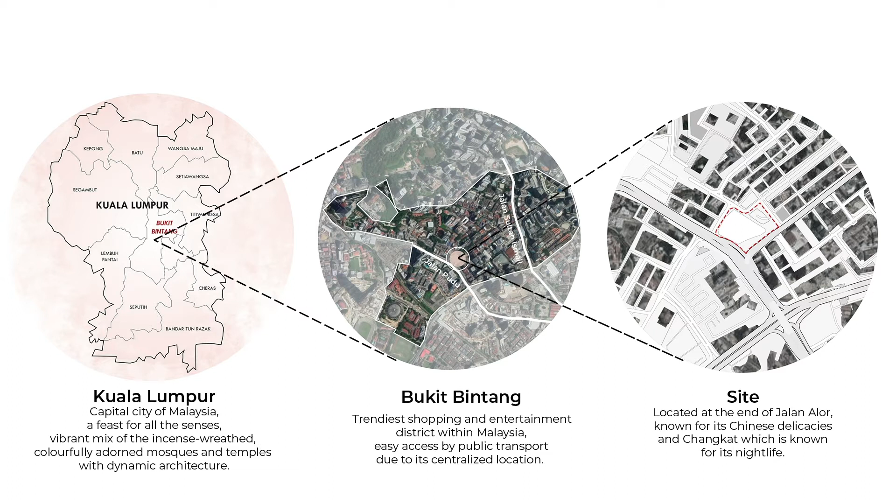Bukit Bintang itself is an enclave of Kuala Lumpur, harbours many beautiful layers of life and forms within a developing urban setting. A city of movement, the life in Bukit Bintang never ceases to stop beating, even until dusk, where the street lights and another new side of life start beating again until late night. However, in current pandemic times, it has also cast a large shadow while the public remains unaware of the many hidden perils of the site.

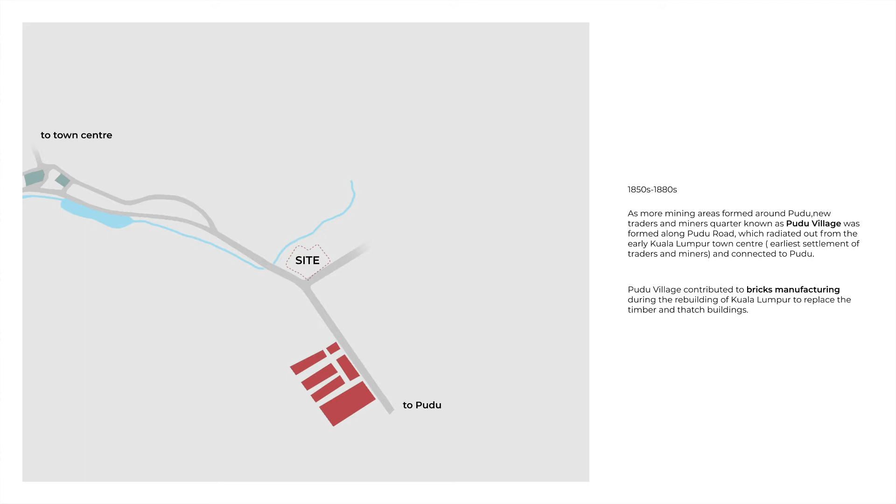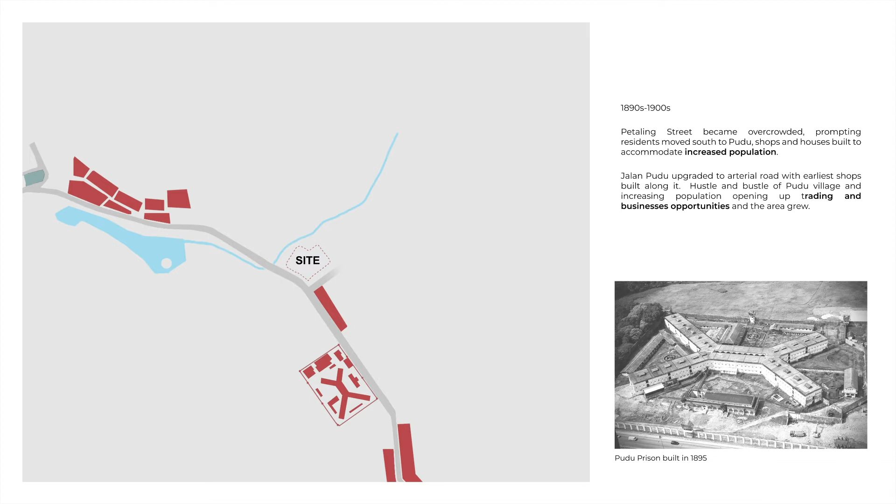In the 1850s to 1880s, as more mining areas formed around Pudu, new traders' and miners' quarters known as Pudu Village were formed along Pudu Road, which radiated out from the early Kuala Lumpur town centre and connected to Pudu. However, in the 1890s, Petaling Street became overcrowded, prompting residents to move south to Pudu. Shops and houses were built to accommodate the increased population.

Increased population at the Pudu settlement opened up trading and business opportunities, and the town grew. In the 1950s, after World War II, forest and agricultural land were cleared for commercial development; more Chinese residents and traders moved in, and low-rises, shophouses and housing were built for increased needs. Over time, the enclave became economically self-sustaining. In the 1980s to 2000s, commercialization and gentrification took place.

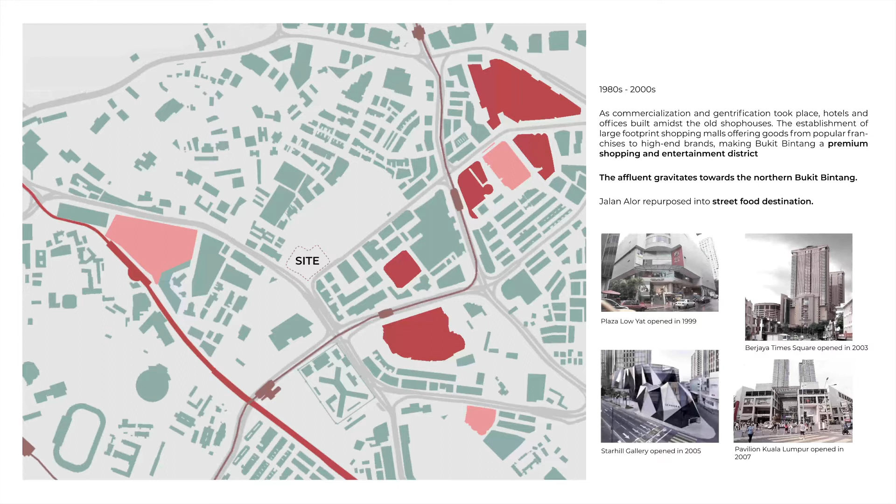Hotels, offices and malls were built amidst the old shophouses, making Bukit Bintang a premium shopping and entertainment district. The affluent gravitate towards northern Bukit Bintang. Jalan Alor was repurposed into a street food destination. From 2010 to 2020, Greater KL became one of the national key economic areas. Urban connectivity of the Southern Golden Triangle was enhanced further. The Bukit Bintang MRT station was built to strengthen business activity. The migrant worker population grows in parallel with increased job opportunities, making it a city of migrant workers and locals.

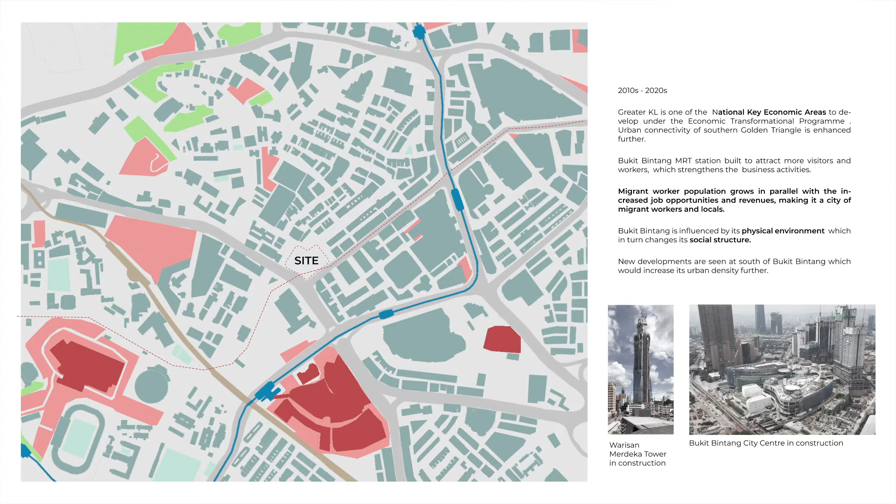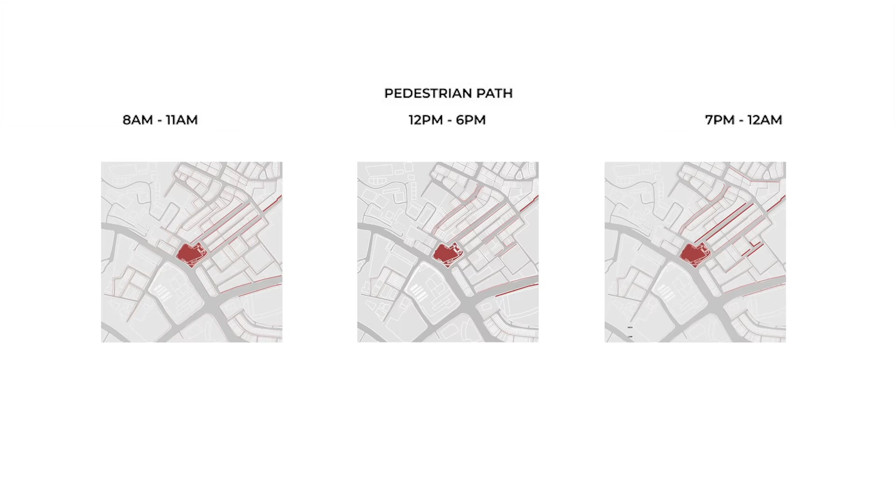The LRT and monorail have been a major convenience to the area as they were built in proximity to the site. While most locals drive to the area by private transportation, there is a bus stop situated next to the site, just in front of the shop lots along Jalan Pudu.

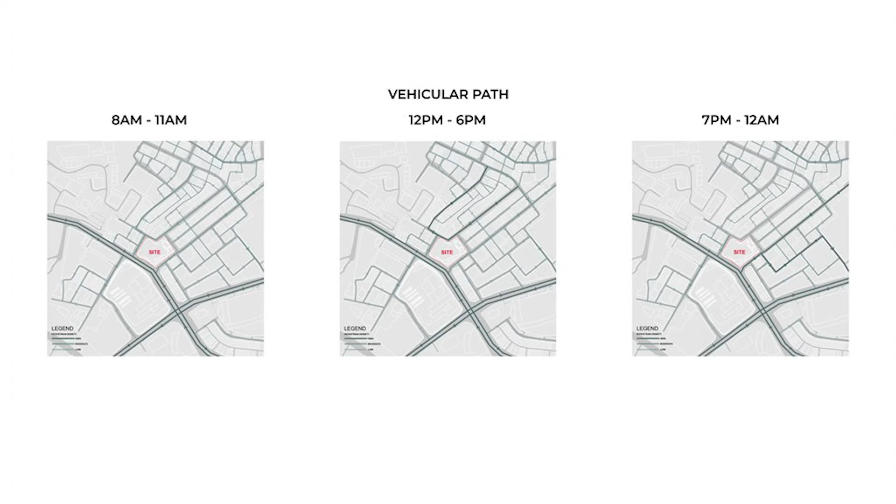The vehicular path can be seen at its peak densities in the afternoon during lunch hour and before the night market starts along Jalan Alor. Jalan Sultan Ismail and Jalan Bukit Bintang can be seen with high vehicular densities from the morning, as people head off to work, until late night, as people go shopping and have dinner.

The pedestrian density of Bukit Bintang consists of a huge contrast between daytime and nighttime. Social gatherings are observed more during nighttime, especially in Changkat Bukit Bintang and corners of Jalan Bukit Bintang. Meanwhile, Jalan Alor acts as a hotspot for locals coming to experience the food at night. The streets also indicate more migrant pedestrian density during noon, in preparation for the night activities.

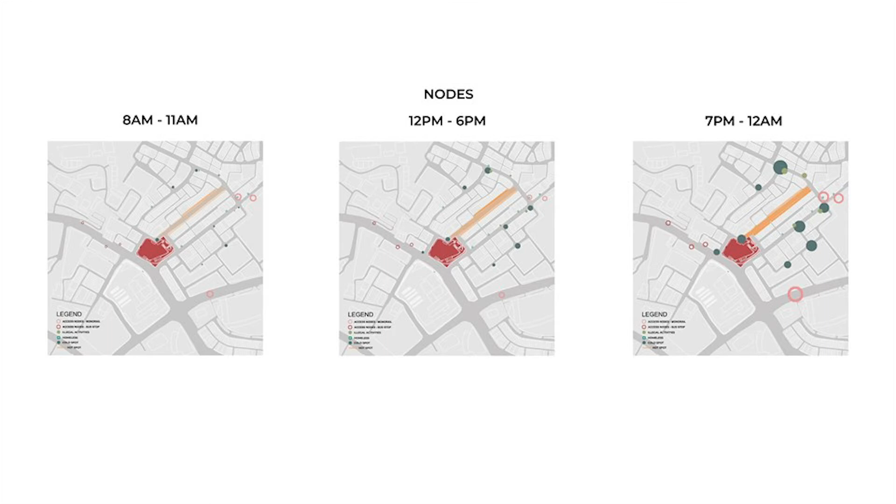Furthermore, homeless beggars are found within Jalan Bukit Bintang and Changkat Bukit Bintang during both day and night, whereas illegal activities increase more during evening and nighttime.

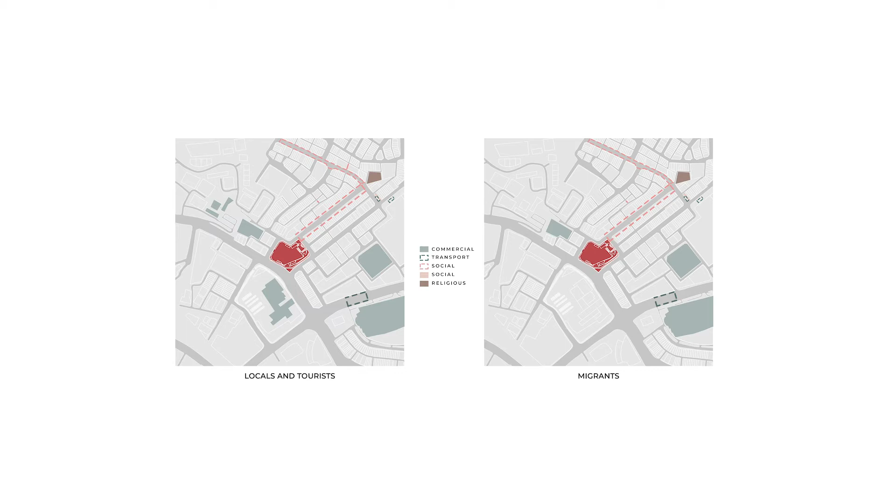As landmarks are objects or features of a town that are easily seen and recognized from a distance, different users tend to have different perspectives on what places they identify as landmarks. For locals and tourists, common landmark identifiers are Lot 10 Plaza, Times Square, and even the Chinese Hill Maternity Hospital and the KL Baptist Church. Let alone for the locals in the area, the Jade Garden apartment is known to be a residential area for some of the locals within the site.

Jalan Alor is also known as one of the main social landmarks for locals, tourists and even migrant workers, as the street functions to serve most of its users, many of whom are migrant workers. In addition, next to Jalan Alor resides the residential area for the majority of the migrant workers.

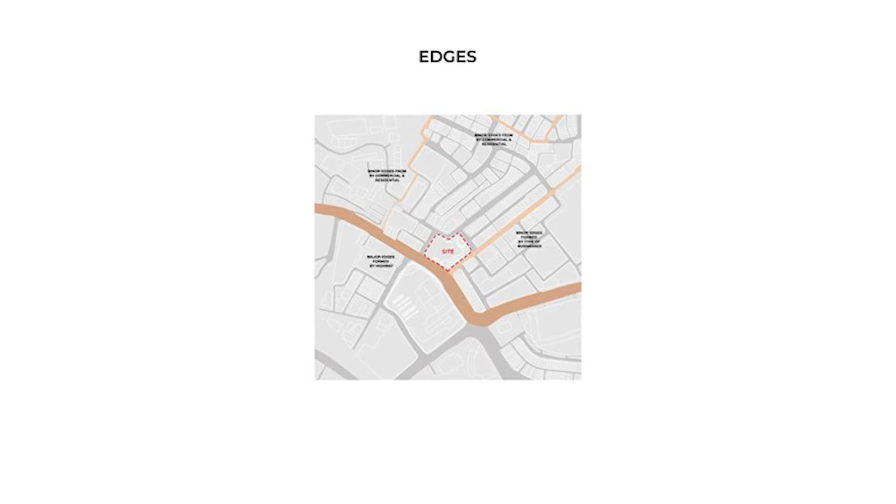The major edges can be seen along Jalan Pudu all the way up to Jalan Imbi, as its edges are formed by the highway. On the other hand, commercial and residential areas also form a minor edge, while different types of activities and business happening in the area also form another minor edge. This clearly shows that major edges come from permanent edges, while minor edges depend on the ongoing activities and business in the area. The user groups around Site B are generally categorized into three categories.

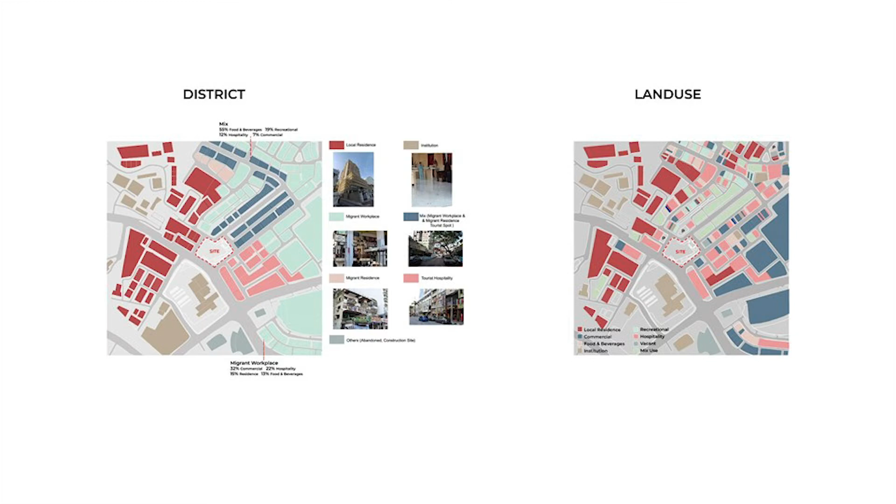These are the local, migrants, and tourists. The district of the local is mainly residential and is surrounded by institutions such as schools and hospitals. Majority of migrant district overlaps with tourist district, as most of the migrant workers work in the commercial sector in tourist districts such as restaurants, massage, and hotels.

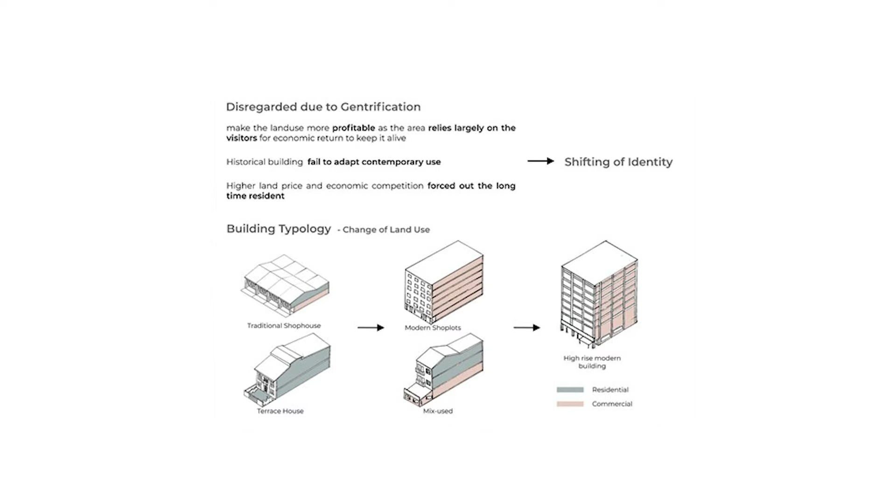The physical design of Bukit Bintang is mainly aimed at creating a high-end shopping precinct for visitors and business operators. Fine-grained shop house and housing typology allows denser urban streets and encourages higher intensity of life between buildings, but it is slowly being replaced by coarse-grained modern buildings with larger footprints.

This transformation is due to gentrification. In order to make the land use more profitable, as the area heavily relies on visitors for economic return, historical buildings failed to adapt into contemporary use, thus becoming less efficient with suboptimal utilization. High land price and economic competition forced out the long-time residents, resulting in a shifting of identity.

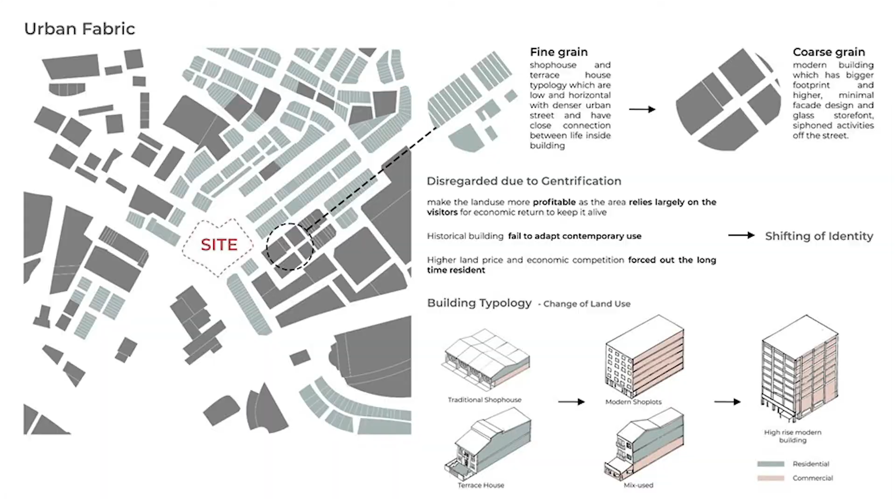Building typology, change of land use. The building typology started with low-rise shop houses and housing built by Chinese residents, then transformed into vertical mixed-use buildings and shop lots with much bigger footprints, with commercial activity at ground floor and upper floors utilized as living space for migrant workers.

Modern high-rise buildings in Bukit Bintang have fewer stores and activities happening at the ground floor compared to surrounding fine grain, traditional buildings. Few traditional shop houses remain around the historical streets of Changkat Tong Shin, Jalan Pudu, and Jalan Sin Chew Kee. Their poorly preserved state results in diminished cultural significance.

Modern. Transformation of Bukit Bintang as the shopping and entertainment district ensued an increase in population and financial profitability. Commercial and mixed development buildings of various scales replaced traditional shop houses, redefining the place's character.

Facade. Building typology at Jalan Bukit Bintang has changed dramatically throughout the century, displaying a varied collection of shop houses and high-rise buildings. The harmonious and continual visual quality along Changkat Tong Shin is broken by modern structures, a sudden change of skyline, distinguishing from the humble traditional shop houses.

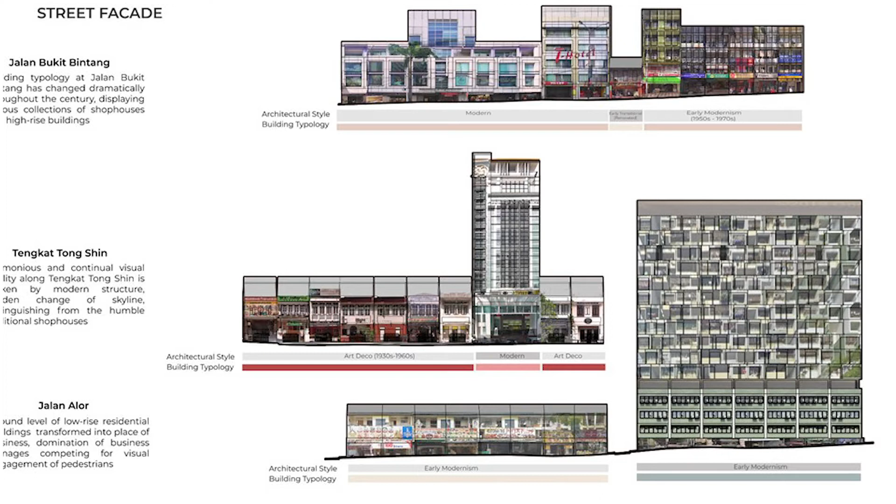The ground level of low-rise residential buildings has transformed into places of business, with the domination of business signs competing for the visual engagement of pedestrians. As Bukit Bintang becomes more compact and denser, social activities are encouraged at the front street. Main streets are vibrant with cultural reference and community identity, and house streets and alleys are being used.

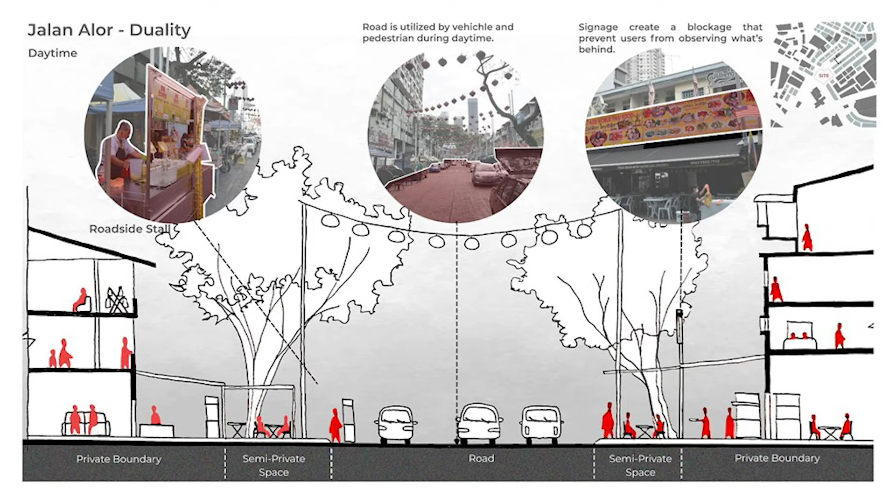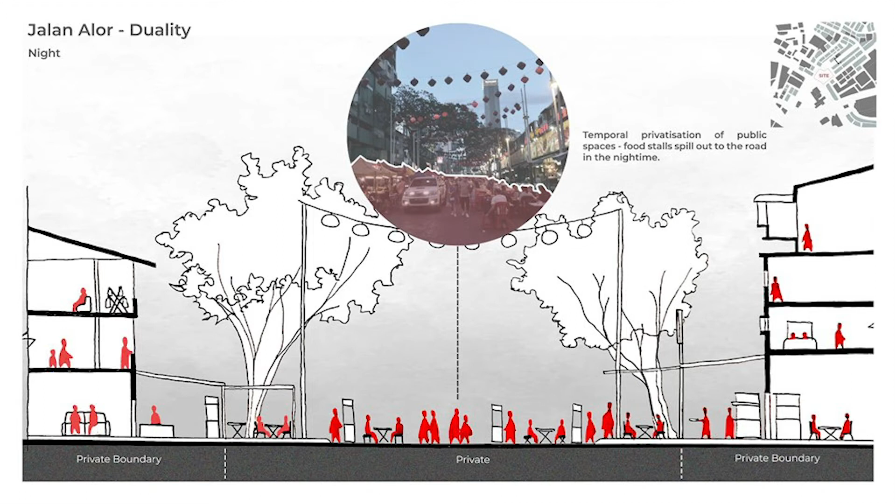Jalan Alor, Duality. Jalan Alor is a famous food street with consistent low-rise buildings, giving a comfortable sense of enclosure. The land use started off as residential and transformed to mixed use with food and beverage businesses at ground floor that extend all the way to the pedestrian path.

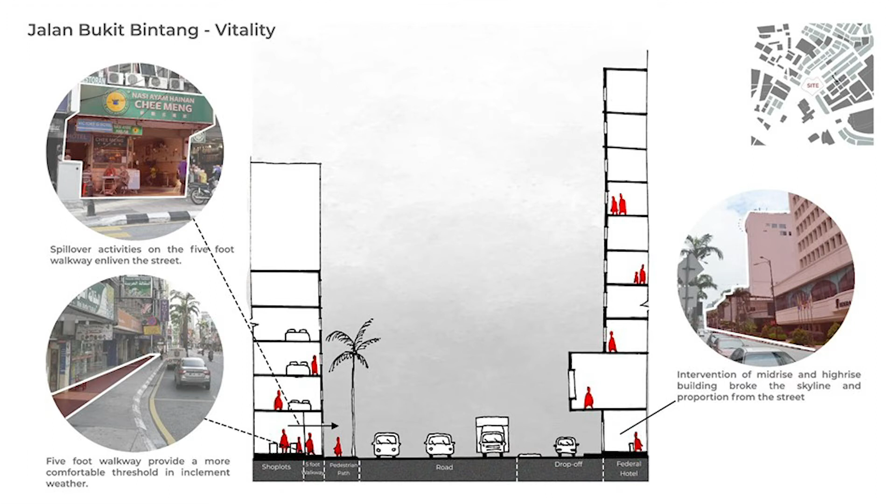Jalan Bukit Bintang, Vitality. Jalan Bukit Bintang is a popular shopping street with high pedestrian and vehicle density. Spillage of business activity onto five-foot walkways enlivens the street. Injection of modern mid-rise and high-rise buildings varies the skyline and proportion from the street.

Jalan Tengkat Tong Shin, Belongingness. With the preservation of traditional terrace houses utilized for food and beverage business at ground floor, it expresses the original characteristic of Bukit Bintang.

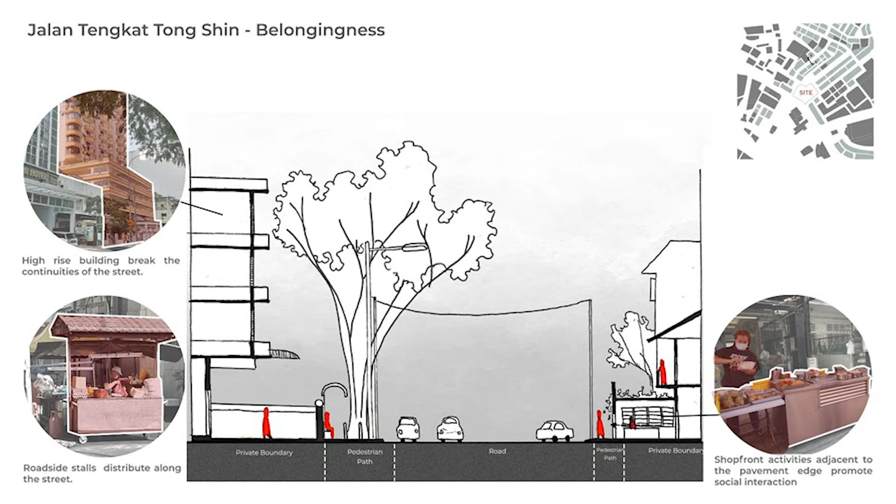Back alley of Jalan Bukit Bintang, Confined. The back alley with a high level of enclosure is a transient space for pedestrians. Jalan Rembia, Vibrancy. Jalan Rembia as a back alley is rejuvenated through activities and purposes. The mural art makes a major contribution to giving the place character and identity, bringing people into and through the place.

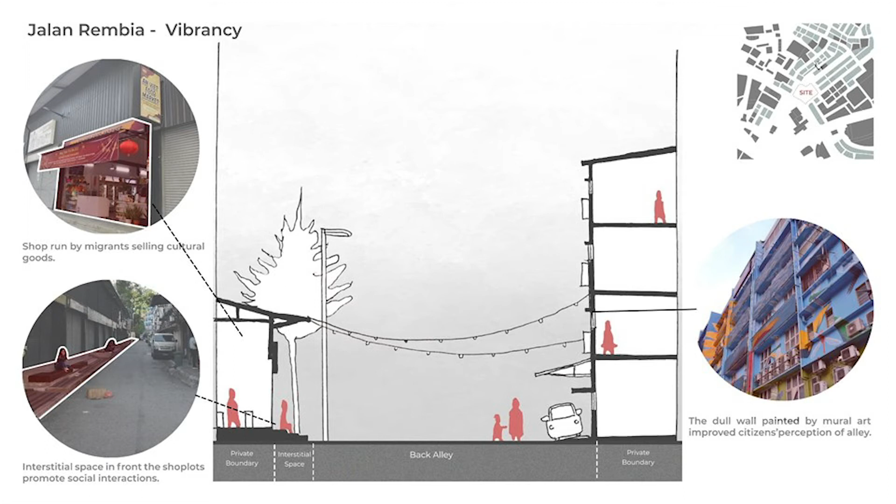For social aspects, it covers the different user group categories, which are the permanent insiders, temporary outsiders, observers, the human interaction, and the movement pattern, as well as issues on site.

Behavior settings. In Bukit Bintang, the existing users are categorized as permanent insiders, temporary outsiders, and observers. Permanent insiders include local residents and local traditional business owners.

The current existing traces and presence of local communities is notably reducing due to the gentrification of economic and modern building developments. Seen from the local perspective, they are slowly losing their sense of belonging to the place, as nowadays the youngsters are moving out from the old streets in Bukit Bintang, and the rapid frequency of building development leads to the fading traces of existing local pride.

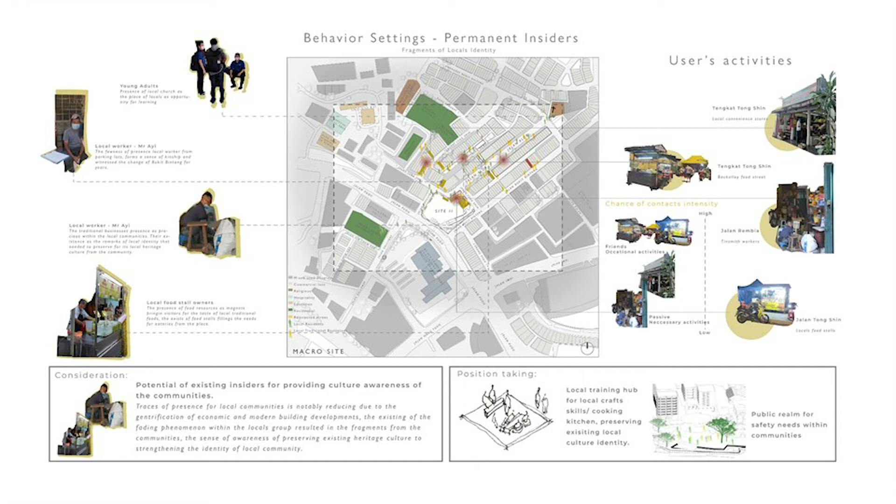Temporary outsiders. The existing communities of temporary outsiders include migrant workers and migrant residents, homeless people, drug addicts, and prostitutes. This user group stays in the old streets of Bukit Bintang for various purposes, with the changes in economic status leading towards the empowerment of economic stresses and social pressure from survival around the site.

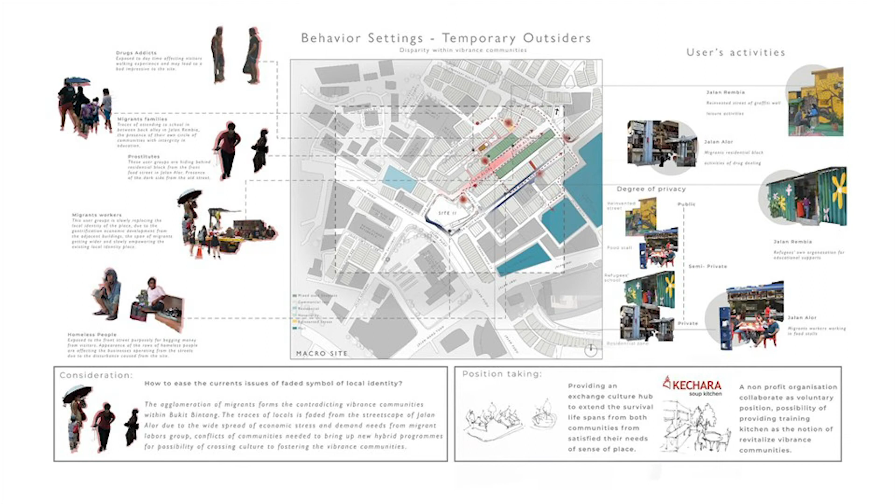With the appearance of vibrant communities comes the presence of a culture barrier, giving a downfall of impression onto the site. The migrant groups are present within the old streets of Jalan Alor. Living in between the conflict of cultural beliefs of local communities inside creates two parallel dimensions of communities lacking the intersection between human cultural interaction.

Observers. The observers include tourists, local visitors, and students. The presence of a young adults user group from local communities and migrant communities forms their own educational institution from their own formalizing way of education.

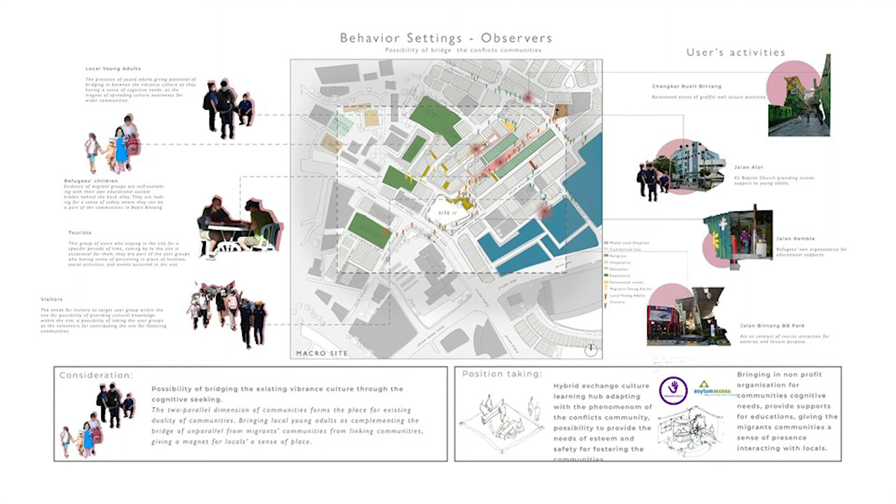The duality of existing communities is needed to provide support for extending their survival span, especially towards the existence of migrant children communities. Living conditions within Jalan Rembia are very poor.

Social issues on site. A bustling street such as Jalan Alor and Jalan Bukit Bintang is known for its progress over the years. However, what most people are not aware of is the conflicting parallel dimensions of different user groups going on at the same time. Homeless people, who are largely comprised of the elderly and the mentally ill, can be seen around the area.

Their presence increases whenever there are visitors on site, as they aim to beg for money. In conclusion, a place with its own characteristic offers its own identity and belonging to the people. As such, the community's needs prove that the contact points of a place enable the intersection between different user groups together, movement pattern and social needs.

For the movement pattern, we analyze the pedestrian movement through tracking the user groups by permanent insider, temporary insider, and observer. During the day, the densest area is Jalan Alor.

Cognitive needs of learning, education, and expressing are shown by the trail of the permanent insider, as they can be seen at schools and banks. Affiliation needs for a sense of belonging to culture are also shown, as the trail leads to local residential, old shops, and religious buildings.

Survival needs of the temporary insider between the community, as a lot of migrant workers are seen walking through the back lane and through shop houses to get to their place of work.

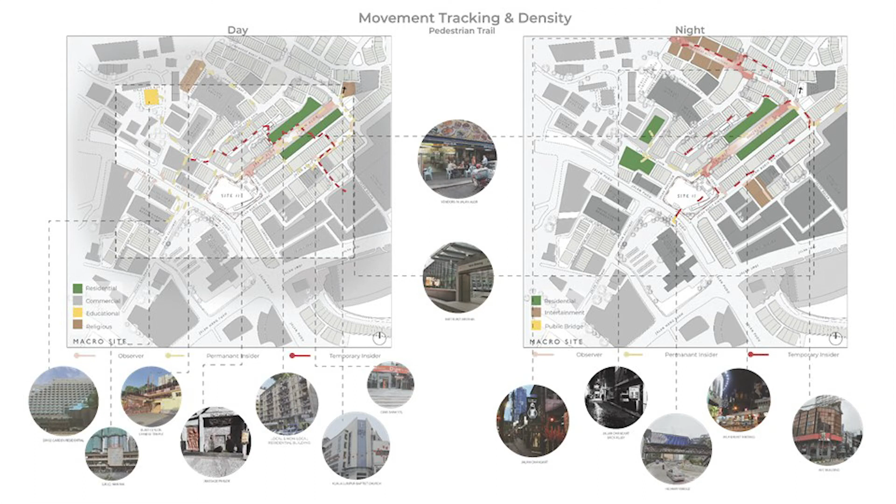Note that during the night, the permanent insider and observer rarely walk through the back alley, while most temporary insiders use the main and back lanes during the night.

In the visual dimension, explaining the social issues within Bukit Bintang could be boiled down into three main categories: the locals' dissatisfaction, the migrants' cry, and in between these issues is the parallel duality that exists within Jalan Alor.

It's been observed that locals in Bukit Bintang show a strong distaste towards the migrants, and some are even calling them cultural bandits, as they are slowly taking over the site's identity in Jalan Alor.

The migrants' cry. Surprisingly, the worries of the migrants and locals differ drastically in the present time. Due to job instability in COVID, migrants are more worried about their livelihood than locals' opinions towards them.

Although most of the migrant workers were documented, they still appeared to be very uncomfortable when they were being approached and often refused to interact.

Due to cultural difference, some migrant workers appear to be ill-mannered in Bukit Bintang, thus making people feel unwelcome.

To further their worries, documented versus undocumented migrants receive pay and benefits differently, and with the pandemic pressure upon them, their future doesn't seem to be bright down the road.

Lastly, to conclude the social issue, we determine that the parallel duality of Jalan Alor embodies the issues of the site: the rift and segregation between the migrants and locals caused by lacking intertwine and interaction.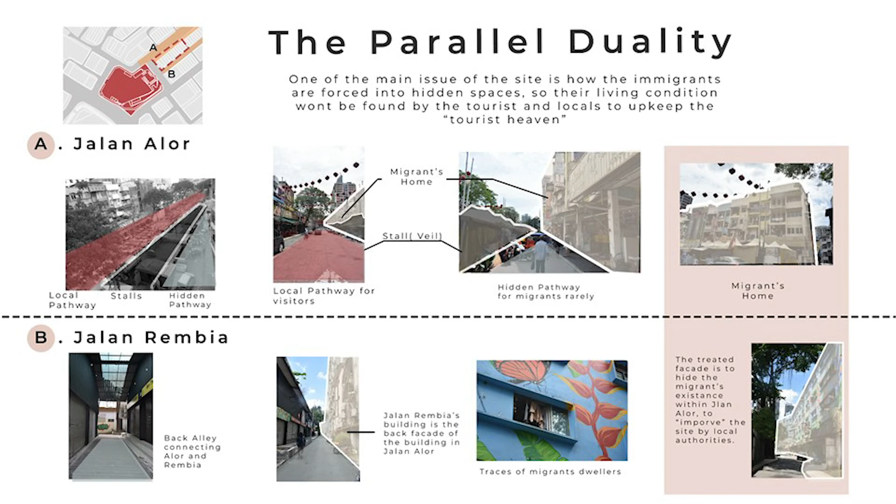This is used to make the real Jalan Alor facade distinguishable from the rear, making visitors unable to find traces of migrants within the building, as if they were a negative influence.

Introduction to microsite. Zooming into the microsite, site section A cuts along Jalan Alor, showing a slight slope in context. Site section B reveals the difference in level of the adjacent roads.

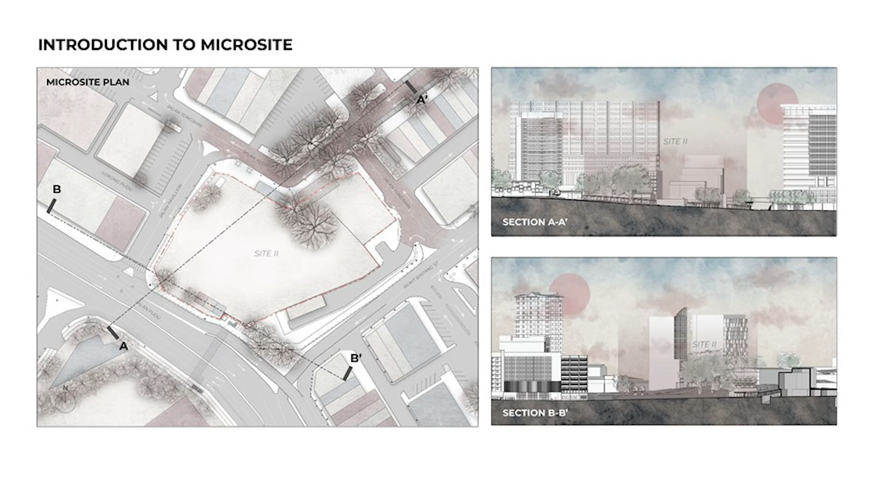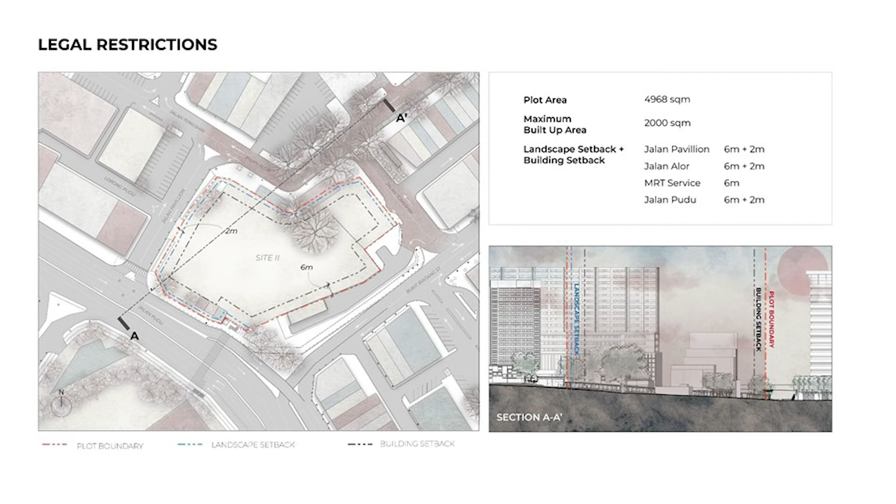Legal restrictions. The plot area is approximately 4,968 square meters with a maximum built-up area of 2,000 square meters. The building setback required is 6 meters, with an additional 2 meters for landscaping.

Softscapes. Softscapes of the site consist mainly of angsana, along with some fiddle fig trees as well as wild cinnamon, while palm trees are located beyond.

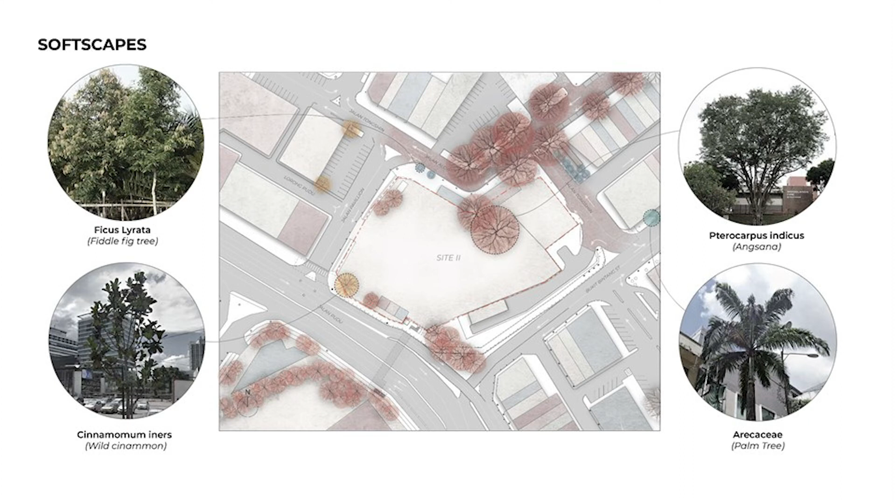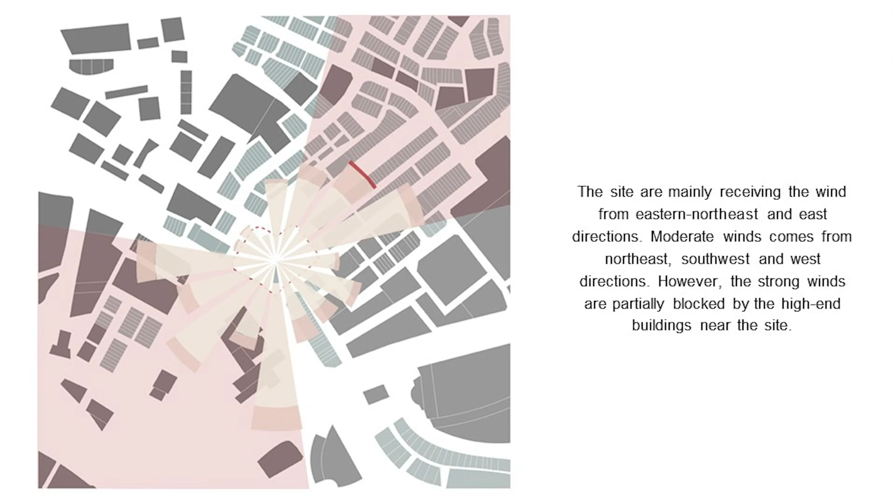Wind pattern. The wind mainly comes from the northeast and east direction of the site, but is partially blocked by the high-end buildings. Shadow pattern: the morning sun creates a west-oriented and longest shadow pattern.

This results in the longest term stays, highly activated area, and highly shaded vegetation area. The early noon sun creates a south-oriented and shorter shadow pattern, which results in the shortest term stay, low activated area, and low shaded vegetation area.

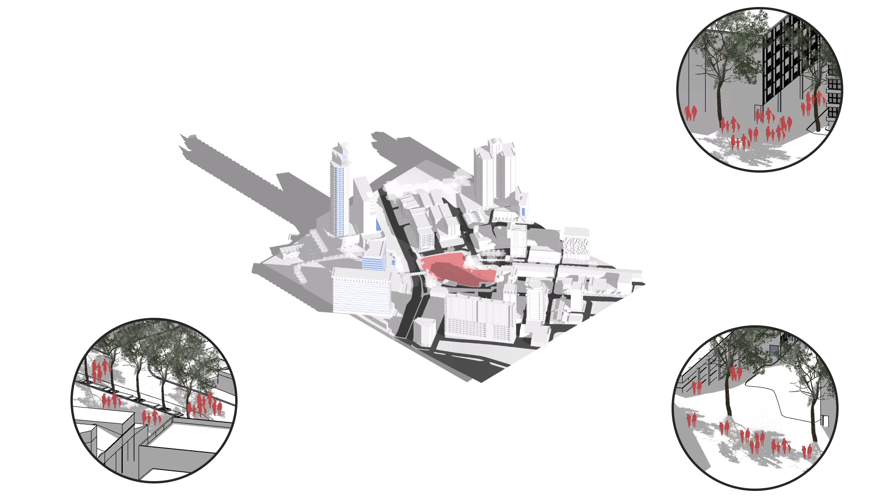The late noon sun creates east orientation and short shadow pattern, which results in short term stay, partially activated area, and moderately shaded vegetation area.

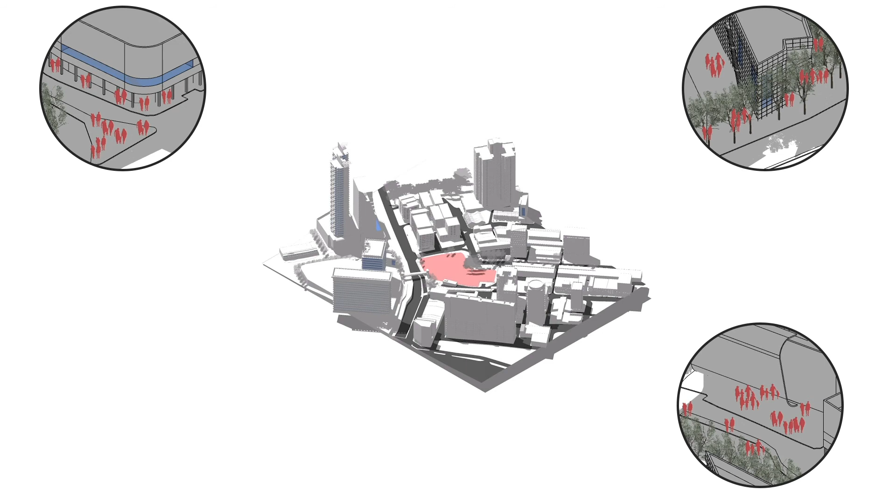The evening sun creates an east-oriented and long shadow pattern, which results in long-term stay, highly activated area, and efficiently shaded vegetation area. Excessive shading is provided at the corner of the site in the morning, and the highly shaded area is at the west area of the site in the evening.

The flow of pedestrians is very low in the solar radiated site during noon. Excessive shading is provided at the site corner in the morning, but the highly shaded area is at the west area of the site in the evening. The flow of pedestrians is very low in the solar radiated site during noon.

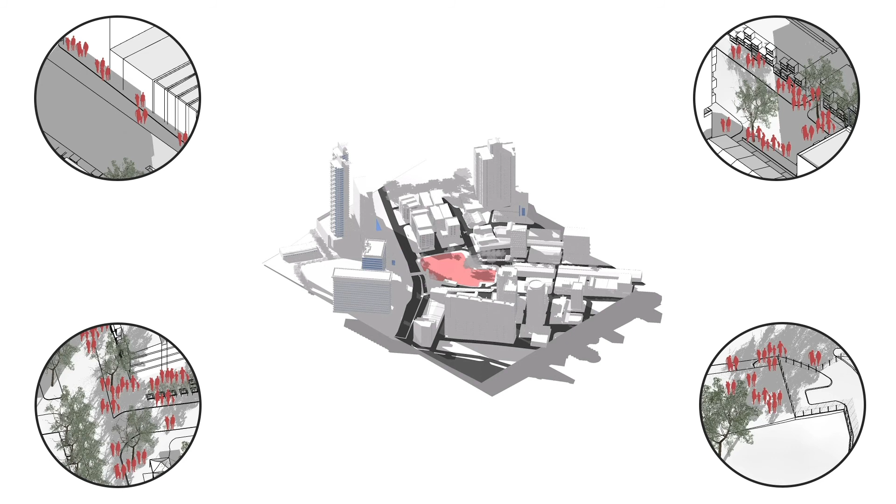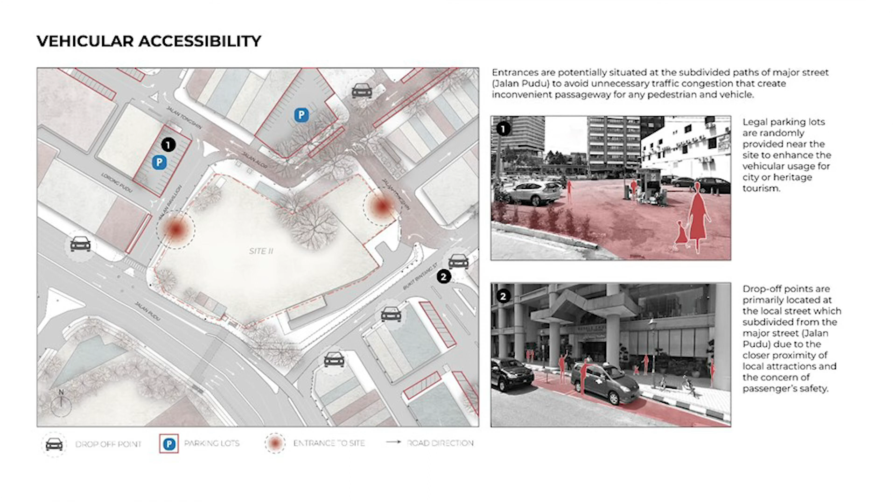Vehicular accessibility. The site consists of an entrance that creates convenient passageway surrounded with parking opportunities and drop-off points that enhance local tourism. Walkability and existing structures.

Walkability of the site is enhanced by street vendors, shaded pedestrian walkway, pedestrian bridge, and site canopies. However, it is declining due to inconvenience brought by the MRT service.

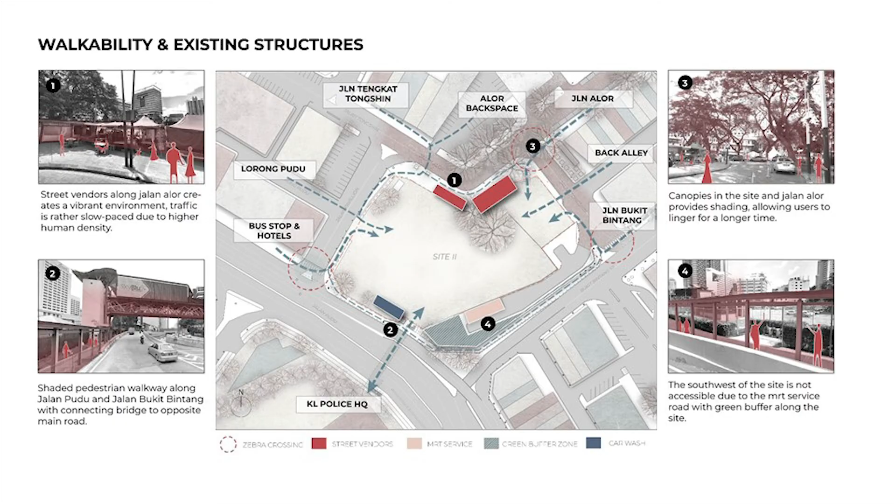Views from site. The site was surrounded with different urban layers such as greeneries, bold buildings, and shaded pedestrian walkway at the north, while heritage core areas services and urbanized street at the south.

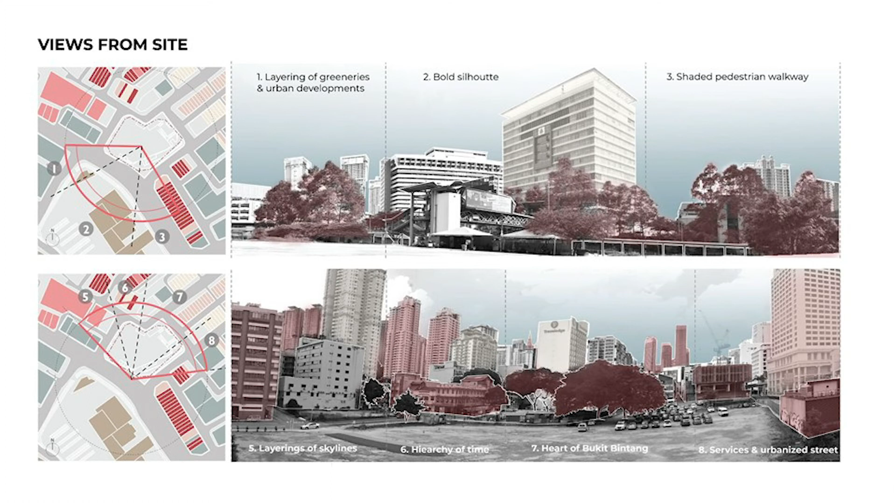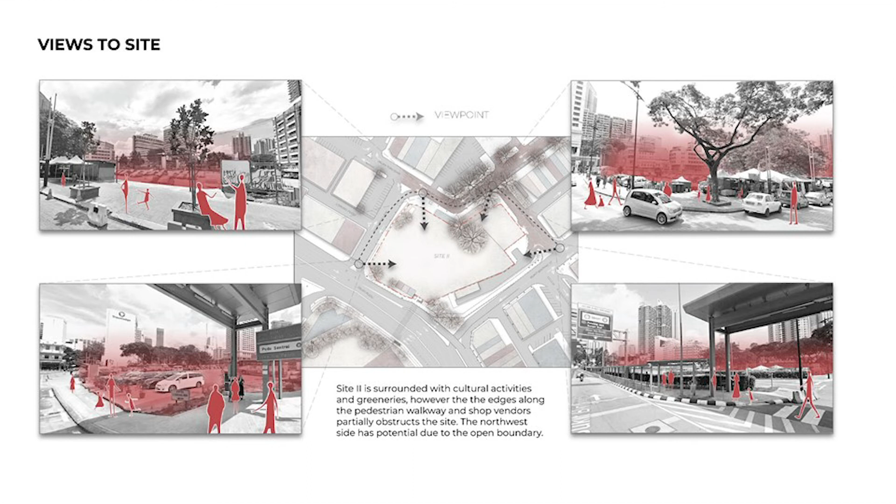To conclude the microsite with SWOT: the strength of the site is its connection to the endpoint of each street and tourism hotspot, which gains a lot of pedestrian attention while also maintaining a very strong surrounding context connection to the current local site identity. The site is also located within the Golden Triangle Economy Zone, making the area still growing and attracting more potential programs.

The weakness, however, includes the lack of green spaces, noise and air pollution as the site is adjacent to the main highway, with very limited shading on site and poor accessibility as it is surrounded by hard edges, making it hard for users to access into the site.

As for opportunities, the local context relationship could be improved and many cross-cultural programs could be carried out to improve livelihood, and finally potentially rejuvenating alleyways as a design driver for the community.

The threat on site is the locals' authenticity being challenged with the arrival of immigrants. Furthermore, existing user groups of drug addicts and prostitutes affect local business operations due to the disturbance from their presence on the front footage of the street, and the MRT access tunnel creates a design constraint.

In the tropical climate of Hoi An, Vietnam, the Cam Thanh Community House consists of 3 interconnected pavilions equipped with movable partitions, making spaces flexible and adaptable to cater to various events. The partition provides the house with 2 layouts, one exhibition-based and the other a multipurpose area.

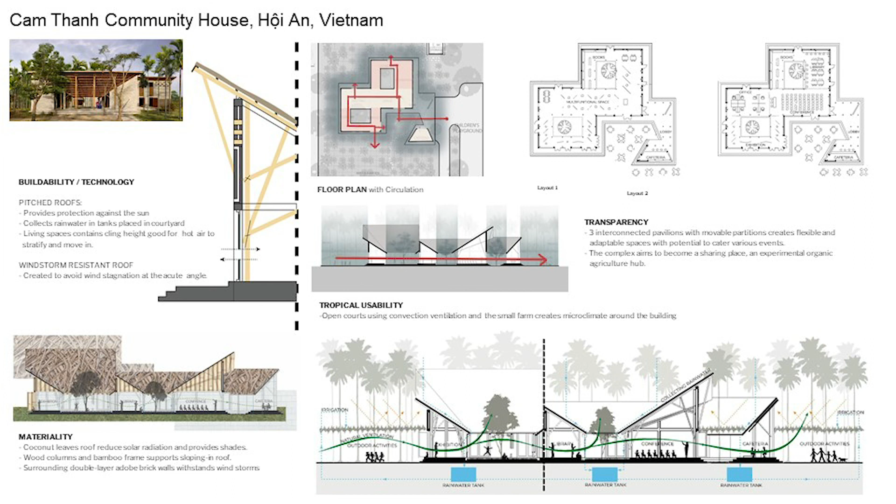Precedent Study 2. Next is the Zhangjiang Future Park of Shanghai, China, which shares a similar urban context of a given site encompassed by intersecting main roads, a river, and a similar demographic of workers and locals. Its civic program provides a library, an art center, a performance center, and a sports center, which are absent in the neighborhood, catering to its users.

The park programs offer an inclusive environment for the majority, unbound to a specific practice, such as the jogging path and rooftop walkway that create connections between various programs. In short, the site can improve social issues by providing adequate civic programs for migrants and locals, improving the quality of lifestyle.

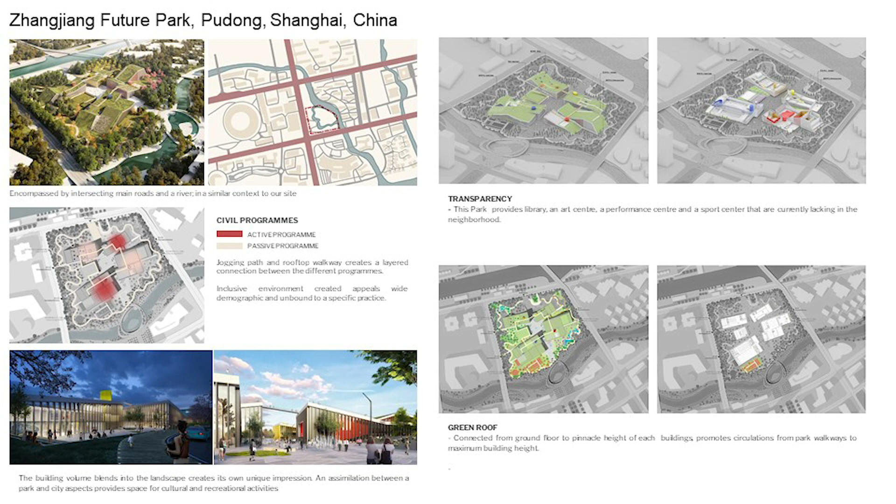Impact analysis. The impact of the project is to allow migrants to live with pride and confidence with a sense of belonging, while preserving the locals' identity and migrants' culture as a new addition, creating new layers. In order to further

instigate harmony within the site, hybrid learning is needed to create collaboration, to create something new in combination of local and migrants, and creating a strong community as a result that builds upon layers of trust and confidence.

For the impact on users, youngsters such as local artists can use the space for innovative movement and activities to promote cultural crossing, while local dwellers are there to provide support and live in harmony with the migrants. As for migrants, it becomes the center of extraordinary meaning to the already vibrant community.

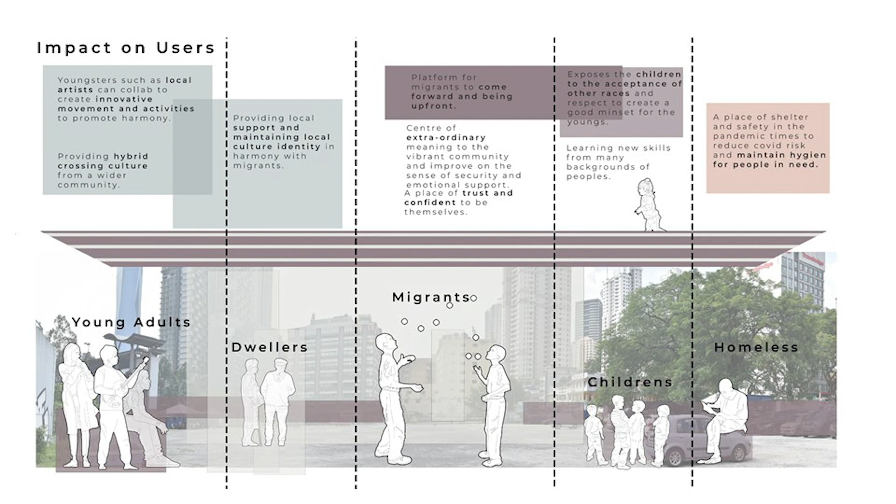Young children could learn new skills and also learn the acceptance of other races to instill a good mindset. Finally, for the homeless, it's a shelter for the pandemic to maintain hygiene.

Taking the presence of social issues, aligning with design position, which brings new possibilities of programs to the site. Food culture should be brought into the urban room programs as to welcome the public and communities within the site. The analysis of social needs of the user group from site is the need of cognition and belonging.

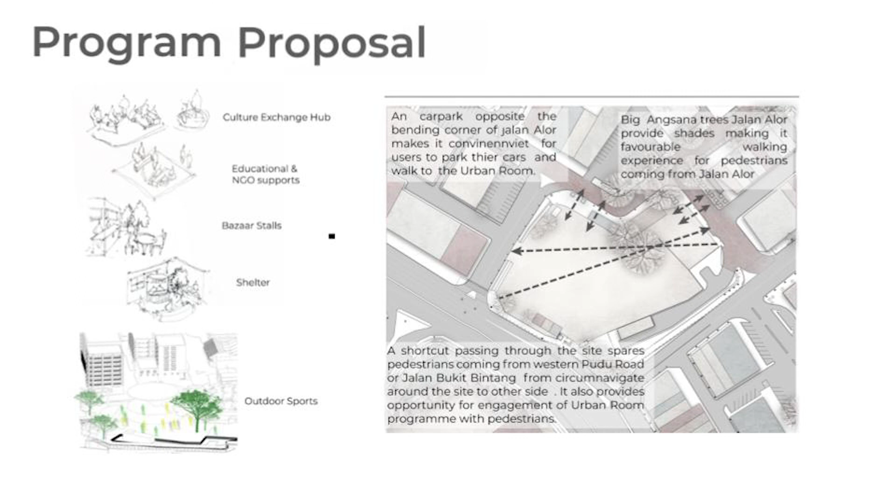Due to the presence of conflict among vibrant communities, the existing organization of Kechara Soup Kitchen Society, an NGO organization, supports the psychological needs of shelter for homeless communities and refugee communities who exist on site for the needs of survival living. Perhaps there is a chance to provide a place to give them a sense of belonging to our country.

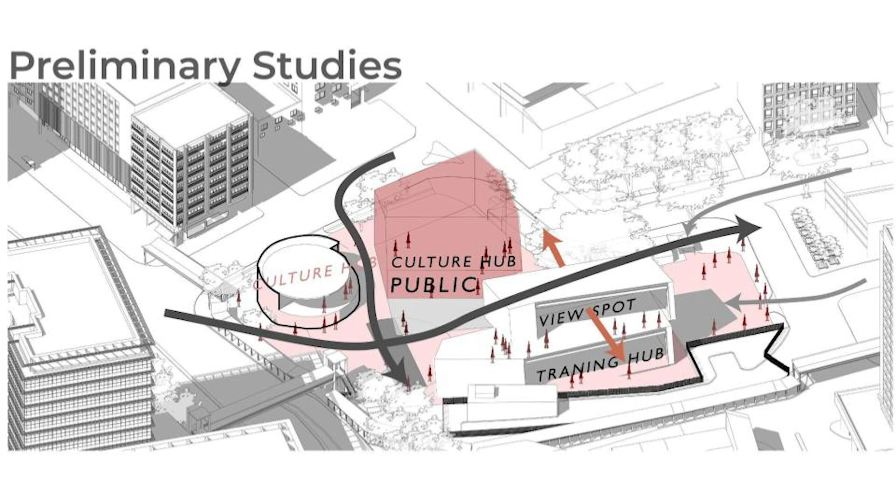Pathways from the highway and from Jalan Tongshin can create an interaction of encounter established within the site, surrounded with a cultural hub, training hub, and a view spot that lets the eye see as far as it can. This creates a harmony of encounters between two different demographics on site to learn, create, and exchange within the urban setting as a form of escape.